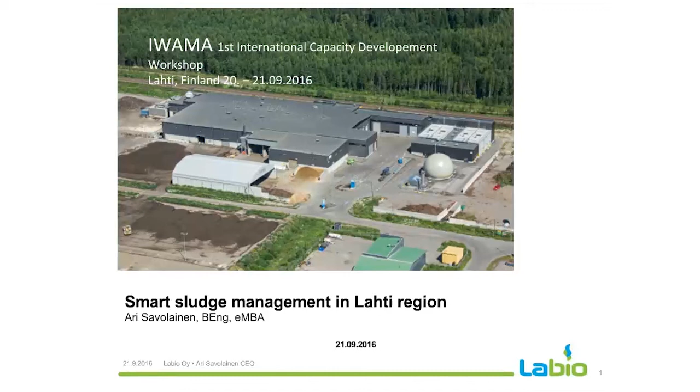Oh, yes. Okay. That's about Labio. Labio Ltd is owned by public companies Lahti Aqua Ltd and the local waste company, Waste Management Ltd. And at the beginning we just did the owners' waste treatment, bio-waste and sludge treatment. Turnover is about 6 million this year and personnel 14 people.

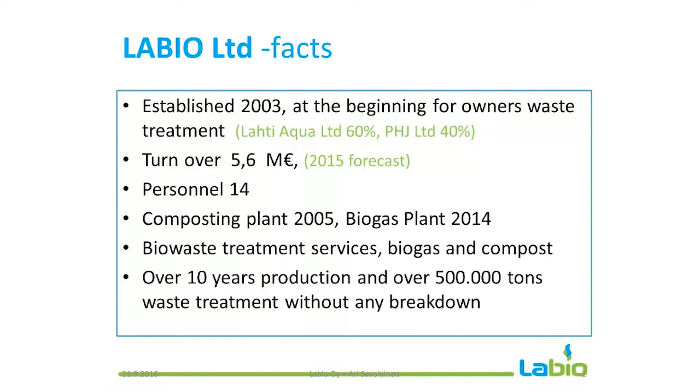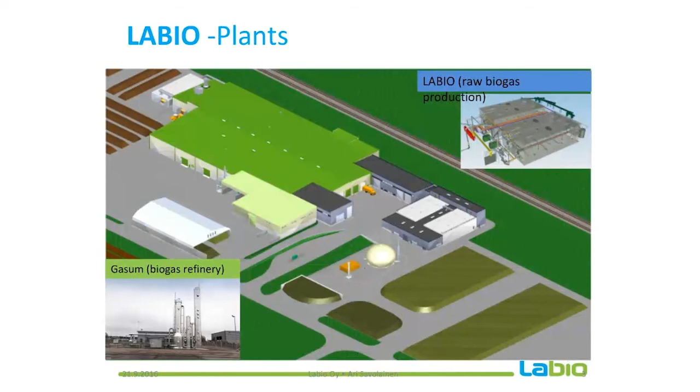Main figures: we are treating 70,000 tons of waste in a year, and this sludge is only part of the total waste amount. About 12,000 tons of this sludge is from Lahti Aqua, and it's already digested and it goes directly to composting, and this 10,000 is undigested sludge and it goes to the digesters.

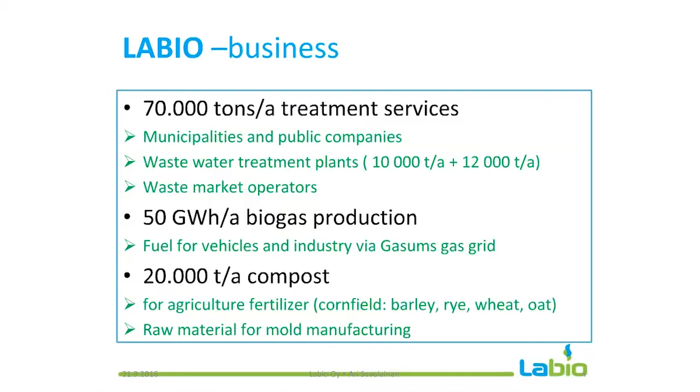And about 25,000 tons of the total amount is coming from the Lahti region, and the rest is coming from South Finland. And the gas production, now it's working at full capacity. It's 50 gigawatt hours per year. And the outcoming compost amount is something 20,000, 22,000 tons in a year, and it's going to agriculture, fertilizer, cornfields, and a little bit as raw material in mold manufacturing.

We have this business network. We have big plants, and we want to have long-time customers, so we have tried to give them some long-term advantage. If some enterprise is bringing the waste to our biogas plant, and they are connected to the natural gas grid, our biogas is also injected in this grid, and they can somehow buy their energy, which is made from their own waste. So they can reduce their carbon footprint also. And everybody is winning with this circle, so we hope that it's long-term business also.

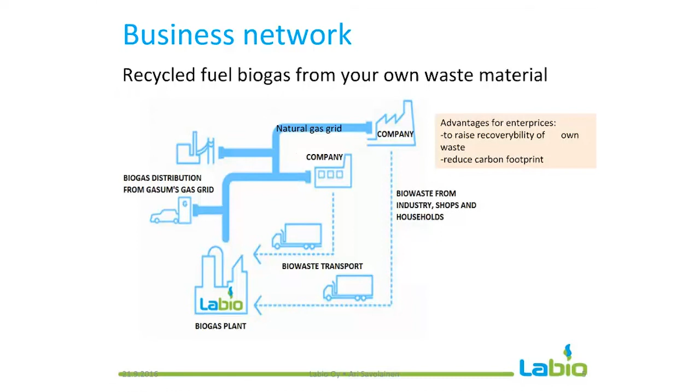The compost product looks like this, 12 millimeter material. It's mostly going to agriculture and a little bit for mulch production. And we have quite much nutrients in the compost, quite much phosphorus and nitrogen in total solids. So, for example, if we are putting nitrogen in the field, some 120 kilos per hectare in a year is the limit, and the highest amount of phosphorus in a year is something 30 kilos per hectare. So this amount is needed for quite a big area, 3,700 hectares, as fertilizer.

So it's mixed. The raw materials are sludge and bio-waste. And in Finnish legislation, it's possible to use it also in agriculture. Let's see how it goes in the future.

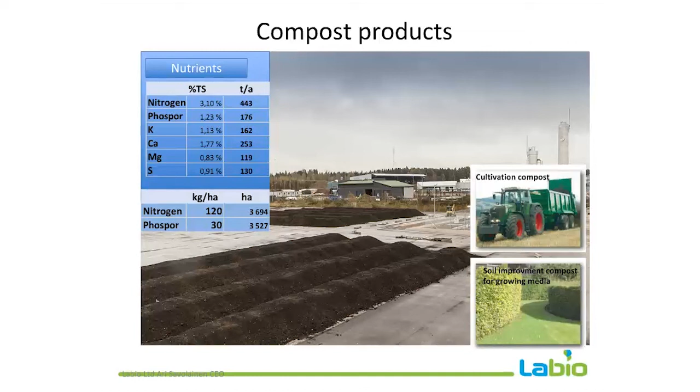Dry digester: the total solids in input material is 30% or 35%, and when it's coming out, it's something 20%. And so we can mix it with other materials and compost it in this composting plant.

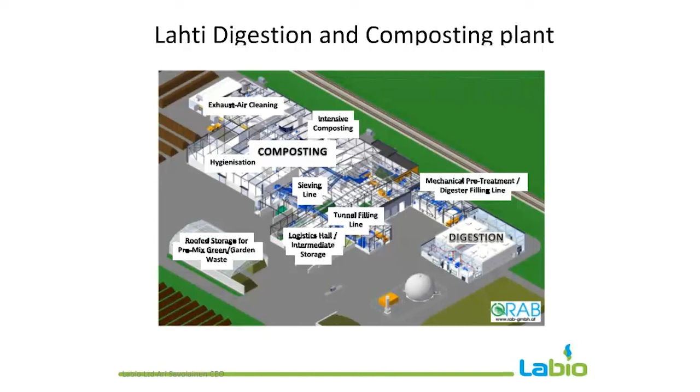Gases, this gas storage, and we are selling the gas to the government. Their plant is here. This is more for engineers, but different tipping plates for different materials, and as I said, most of the biowaste is going to digesters. Maybe 20%, over 50 millimeters, is going to composting and mixed with this digested sludge.

And this is a mechanical pre-treatment, and this is a storage bunker for bio-waste, and these are screw conveyors. The screw conveyors go to the digesters, and it goes through in 20 days, and it's a mesophilic process, something like 42 degrees. And so it goes to composting.

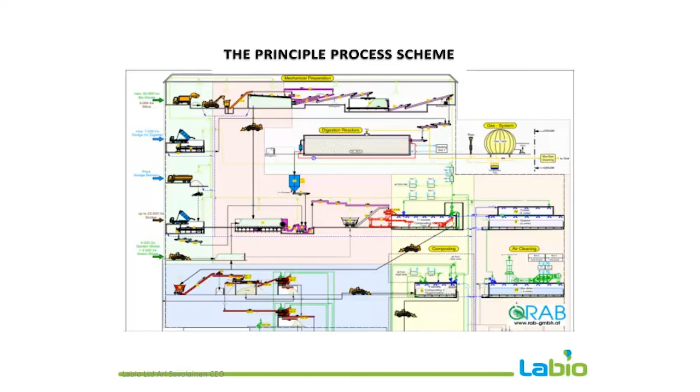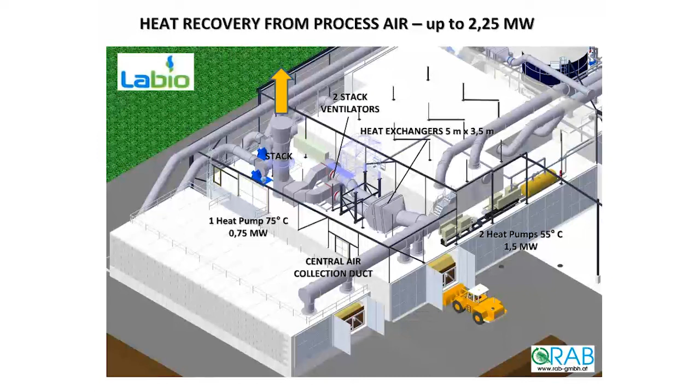We are selling all gas. We are not using any gas ourselves, and we are heating these digesters with heat taken from the composting plant, with heat exchangers and heat pumps. So this is 2 different kinds of heat levels with different heat pumps, and it's more energy efficient now. For many years when we had only composting, the heat was going for the birds only.

And for environmental things, we have 2. Odor is always a big matter in waste treatment, and also, of course, the wastewater. All wastewater is going to the Lahti Aqua treatment plant, and we will go, I think, in the afternoon to check how well it's treated. But I understood it's a very high standard treatment plant.

In the composting plant we have made a very big biological odor emission processing system, and we have a limit for the odor that can come out from the pipe. It's 2,500 odor units per cubic meter, and we have reached the level of 500, and this is more detailed. In the permit it's said that it has to be under this, or the reduction has to be more than 90%.

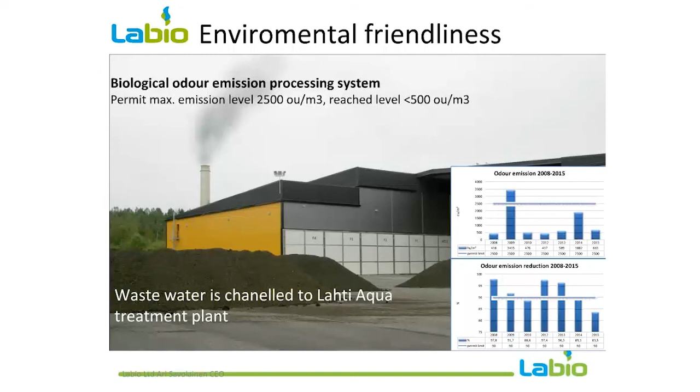Something about energy. I haven't had time to finish this, but material flow: we are treating 80,000 tons of material. What is coming out? Compost, 21,000 tons, and wastewater, something like 25,000 tons.

Talking about energy, we are buying 1.3 gigawatt hours per year of oil, and 5.5 gigawatt hours of electricity. And we are producing 50 gigawatt hours of energy in gas. So we are talking about this gas because we have to make a report every year.

How much? What's the carbon footprint of our biofuel? The reference value is benzin or diesel, and our value is 13 grams carbon dioxide equivalent per megajoule, and benzin has 84. When it's calculated from well to wheel, it's a very environmental fuel.

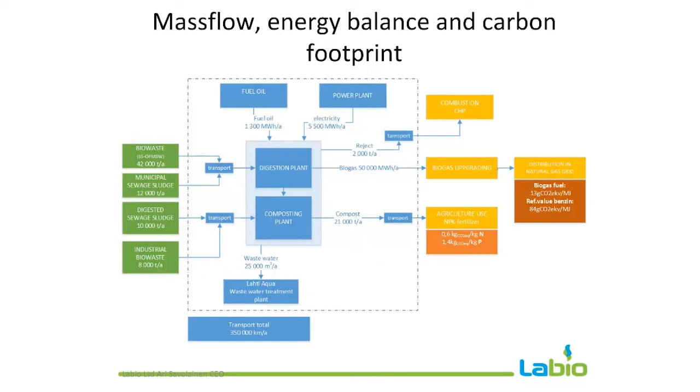And this was also a nice value to know: what kind of carbon footprint our fertilizer has. We calculated that with Lappeenranta University, and it was quite interesting. So this is one part of the study, and Havukainen and Uusitalo from Lappeenranta University made

this calculation. These kinds of nitrogen fertilizers you can buy from the markets in Finland, I think from Europe, and this kind of phosphorus, and their carbon footprint is here, and ours is quite small. So it looks like it's also a very environmentally friendly way to make fertilizers. And if you have a low carbon footprint, you can also say it's a very energy efficient way.